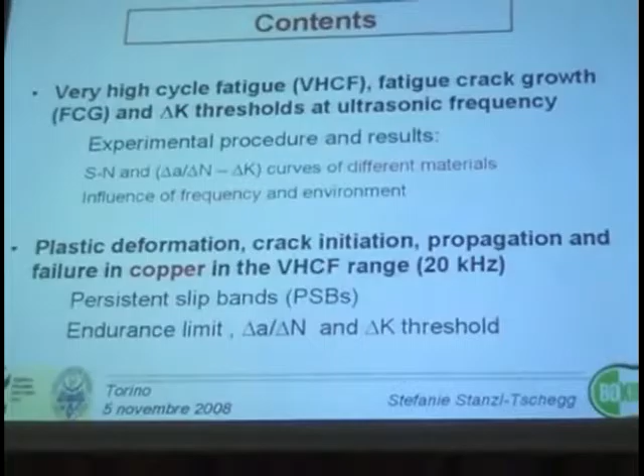I think it could be interesting to show you some more experimental methods which we are using and which we have developed, among these mostly the ultrasonic frequency testing technique. We'll go into some details. You asked about this already, and we'll show you how it works, and I will show you some results, not many, and of course we'll touch the question of the frequency influence. Is it high? How high is it existent?

Then in the second part of this talk, I want to come back to the topic which has been emphasized by Professor Mughrabi, which comes from this cooperation. He showed you the basics, the models, and new results. I want to show you some more experimental work in this field on the resistance limits, on the endurance limit, and also on the propagation problem in this copper material, in this type 1 material, as it has been named by Professor Mughrabi.

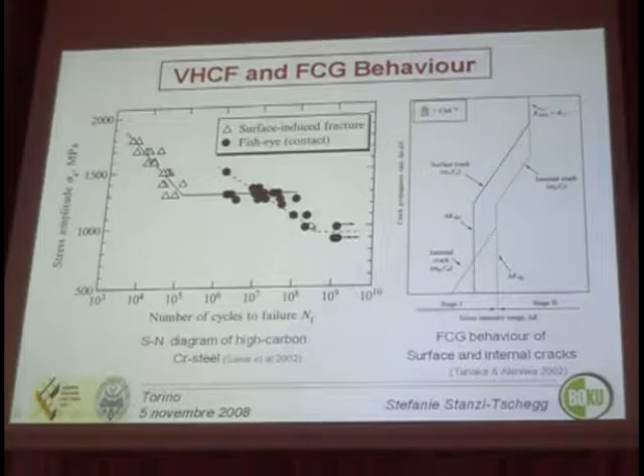And I come back to his introduction: very high cycle fatigue behavior of steels, where people assumed there is an endurance limit, a fatigue limit, until about 15 years ago, in the range of 10 to the 6. It was assumed that in former times we could construct things according to this assumption. But then Japanese researchers found out that there is still failure at much higher numbers of cycles at lower stress amplitudes. These are internal failures which have been discussed here now, and this was a very unpleasant situation to deal with.

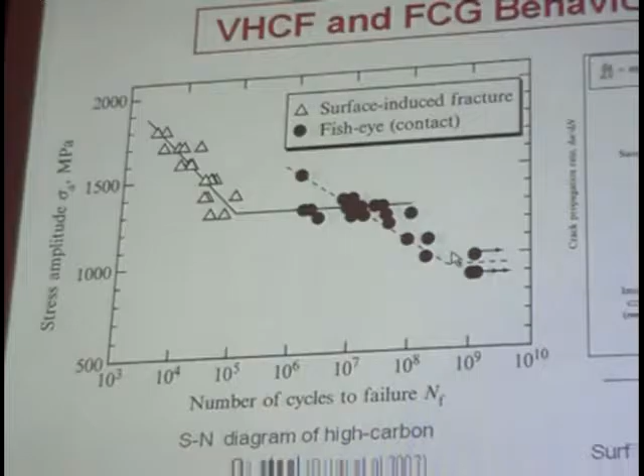How can we use the data of this fatigue limit now? I will show you also some examples on this, and together with this problem of the fatigue limit goes the problem about fatigue crack propagation.

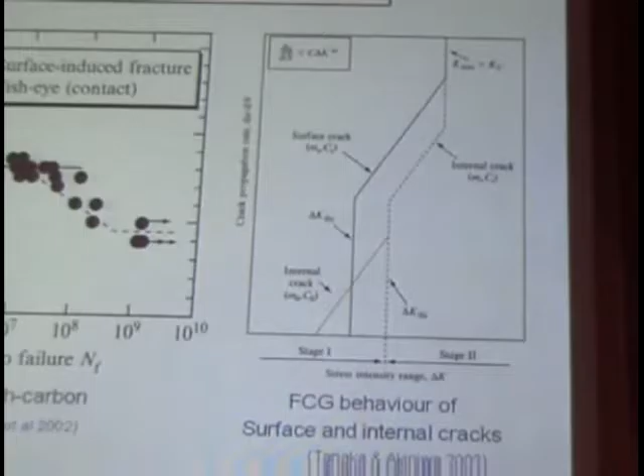Here you have a typical plot of crack propagation rate versus the cyclic stress intensity, which is stress times square root of a times a factor. This is a similar approach, the Paris scheme, where crack growth follows a power law, and then there is some regime at lower stresses where the crack should not propagate, where we have a threshold stress intensity.

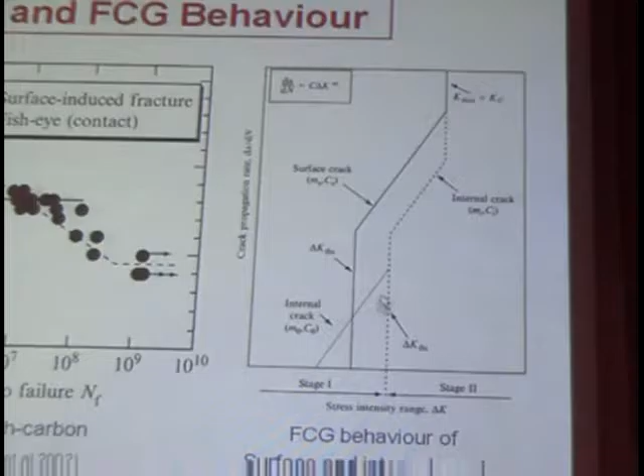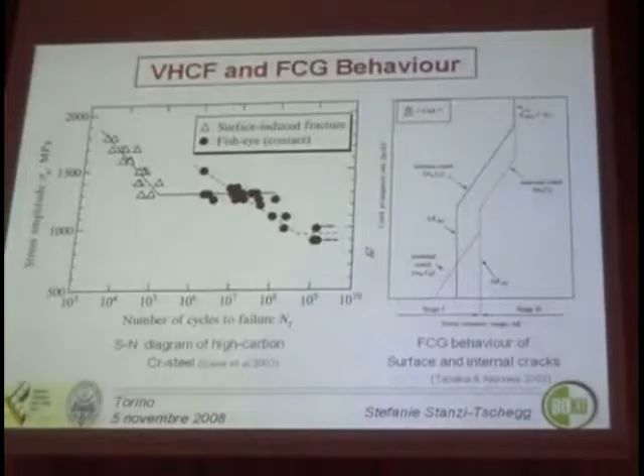This is also of importance to know the crack propagation behavior for cracks coming from the surface and for cracks beginning in the interior. This is the threshold regime which Tanaka, for example, treated: is the crack growing here, or does it have a threshold cyclic stress intensity or not?

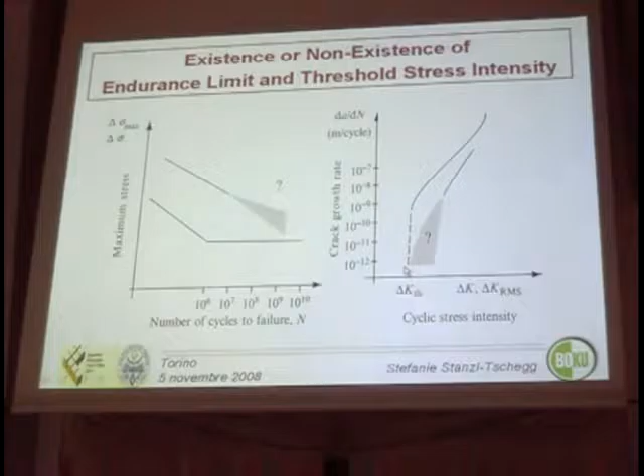So the question is now reduced to this: does the fatigue limit exist, like here, or not? Does the threshold exist in this diagram characterized by rate over cyclic stress intensity, or is there still some crack propagation?

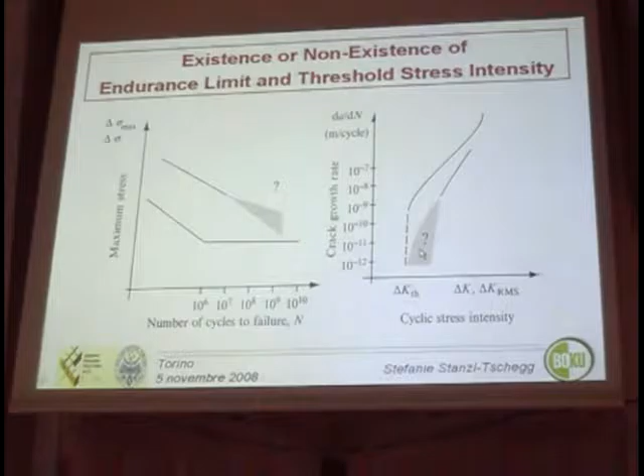We have performed most of our experiments with the ultrasonic testing method, which works at approximately 20,000 Hertz, as shown here. You see, up from 10 to the 8th or 10 to the 9th, it becomes very interesting to use this, due to the time needed for such an experiment. For example, 10 to the 9th needs 14 hours, whereas with the servo-hydraulic machine you already need 1.7 years.

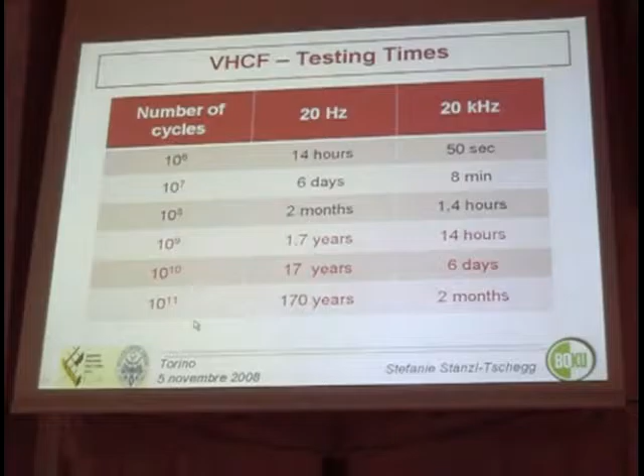Of course, you can use resonant machines and new equipment which goes up to 1000 Hertz, but anyhow, a test at 10 to the 9 will need at least 10 days here, and you see 10 to the 10 and 10 to the 11 become almost impossible to perform with other equipment.

So I come back to my university. This is our main old building. The university was founded in 1865 or even earlier; it's not quite sure how we declare this.

And this is our new building, where we have our institute and where we have further developed this ultrasonic technique. It was first developed in the 1950s, with the idea coming from America, from Mason, and also at our university, the Main University, in the 1950s it began to be developed. Since about 20 years, we have further developed it in our university.

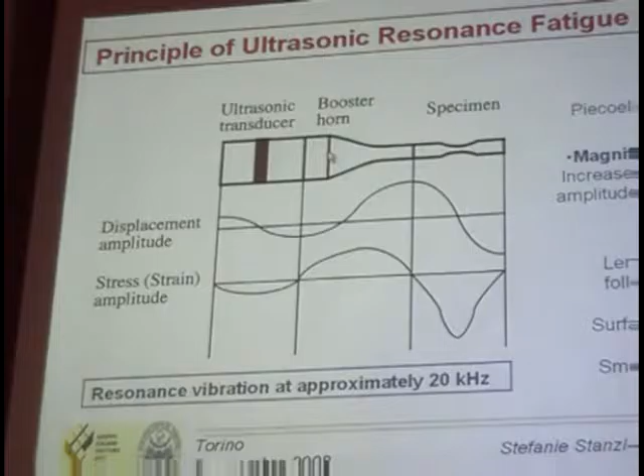So I now want to show you the principles of this. It is a resonance technique using barium titanate crystal, which works with the piezoelectric effect, and we get axial vibrations, or we also can do it with torsional vibrations. In this case, it's axial vibrations, which are then magnified by a booster horn, or amplification horn, made of titanium, and then it's again magnified by such a shape of a specimen.

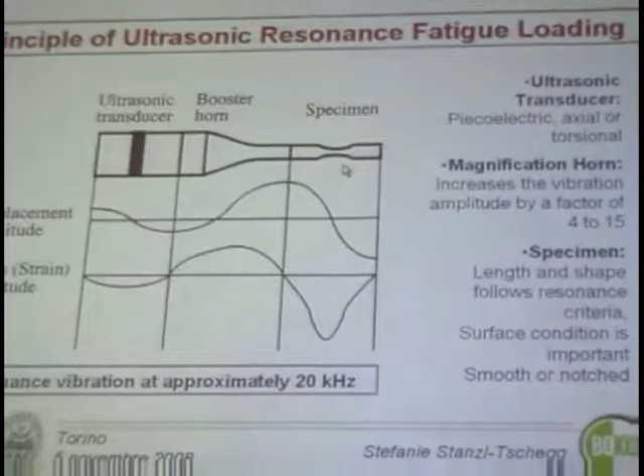The specimen would be cylindrical, then it is not magnified furthermore. Here you see the displacement amplitude, which is highest at the ends of the specimen and of the transducer, and you see the strain and stress amplitude, which is shifted by 90 degrees, so the maximum of the stress amplitude is in the middle, in the center of the specimen.

We use this distribution of the displacement to measure the amplitudes here or here, and then obtain the strains in the middle of the specimen, which also can be measured by strain gauges.

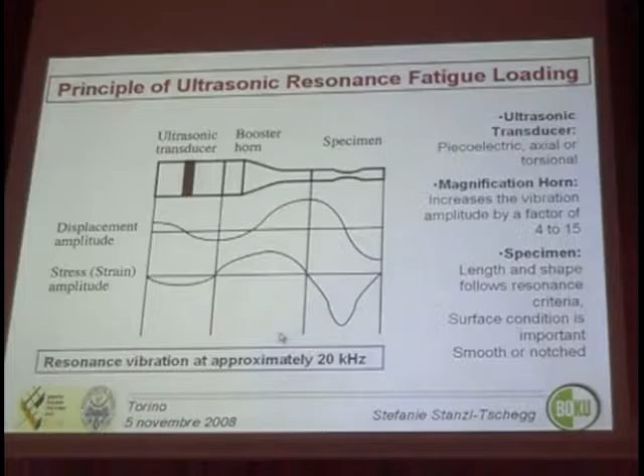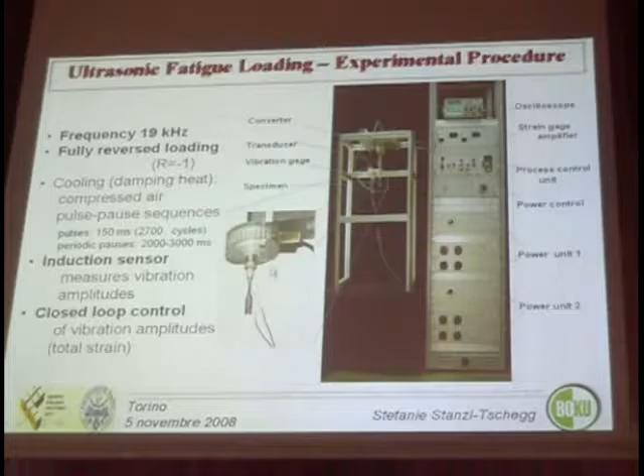I will show you this. This is our equipment, the photograph. Here's the mechanical part, here's the transducer and the specimen, and here this is magnified again the specimen, and a vibration gauge which measures these vibrations, and this is the electrical part, the power unit, the second one, and you can add three more so that you have high enough energy.

Process control, the strain gauge, amplifier, and oscilloscope to show the vibration.

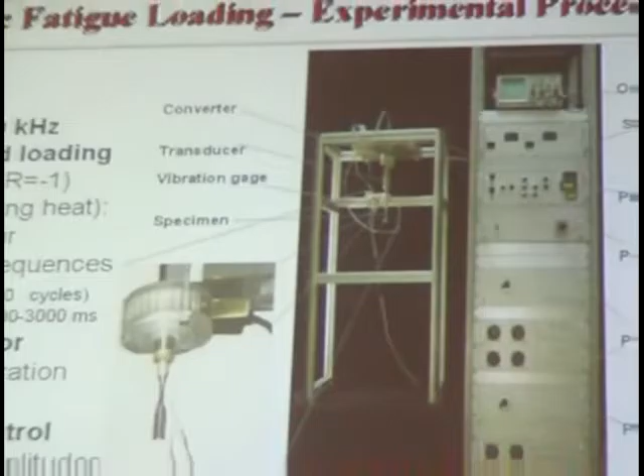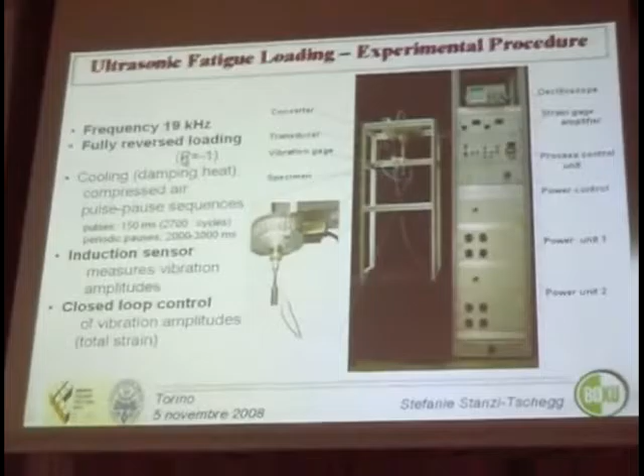So the frequency is around 20 kilohertz, and if the specimen end is free, it is a fully reversed loading, which you obtain with this R=-1, so it's tension compression.

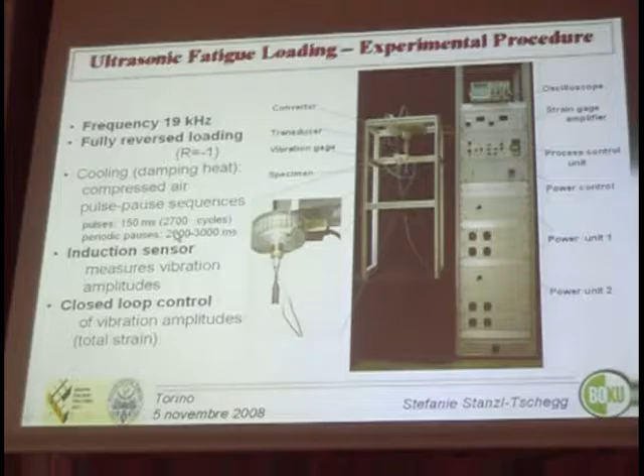We have cooled usually the specimens, at least the specimens or the system, with compressed air, and also we introduced pulses, pulse and pauses, intermittent loading, pulse pause loading, so that we remove the damping heat.

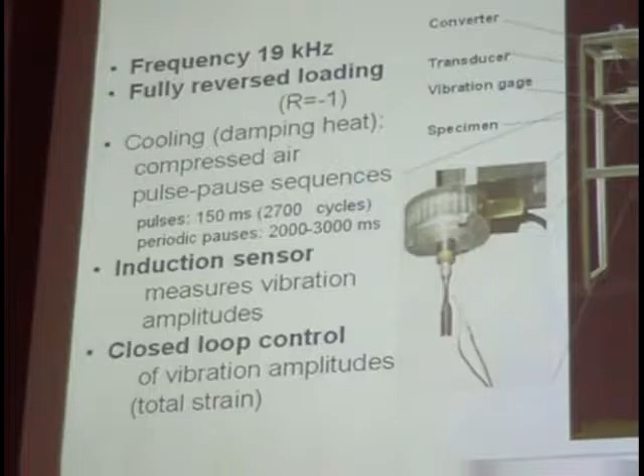Then we obtain room temperature and the temperature that we want to have. And what is important is also that we use the signal of this vibration gauge to control the process, to have a closed loop control, and to have a good and reliable control of the whole thing.

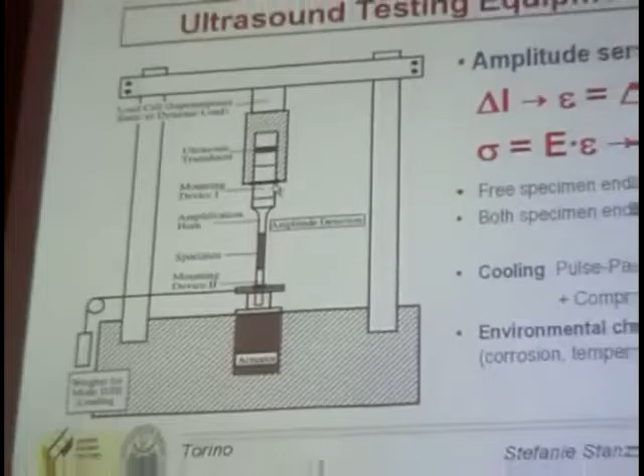So here you see again schematically how it works. This is the ultrasonic transducer, the amplification horn, the specimen, and a loading frame.

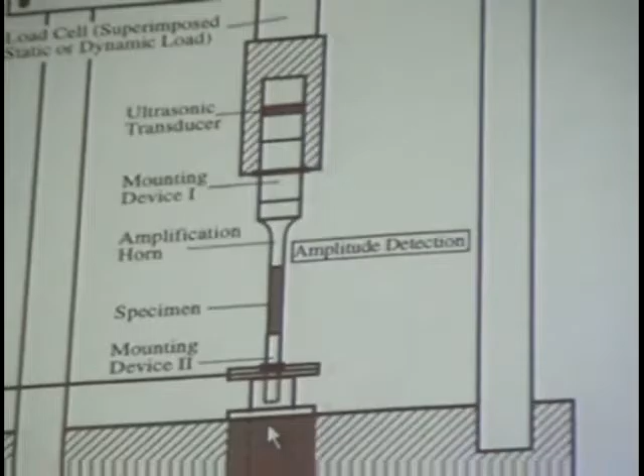In this case, it is shown that we also can fix the second end, so we can superimpose a static load to have mean values of loading larger or smaller than -1. So we have tension preload or compression preloading.

And here is shown how we obtain our stresses usually. We measure the displacements, get from this the strain, or we measure directly the strain gauges, and from this we get the stresses, usually just using Hooke's law, multiplying by the modulus of elasticity, and from this we get the cyclic stress intensity by multiplying with square root and so on.

So this can be done if there is almost no plastic deformation. Then it is enough to do this, but I will show you then what is going on if we have larger plastic strains.

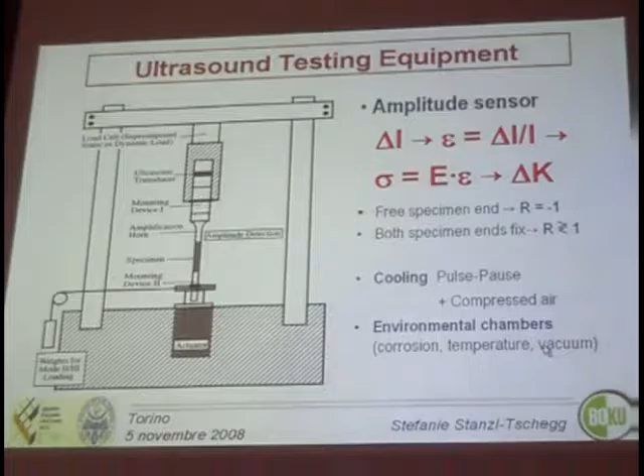Yeah, I told you already about the cooling necessity, and also we can introduce other environments by putting a chamber around this, corrosion tests or temperature, or we also can perform tests in a vacuum.

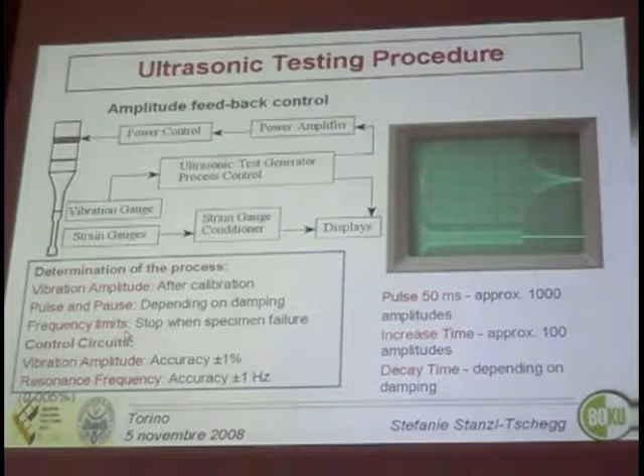And we can predetermine these amplitudes and can measure our vibration amplitudes to an accuracy of ±1%, which is quite good. And we can use the frequency also to stop the experiment if the frequency is changing. This means that there is a crack in it or some other thing which we specify.

So this only shortly. The specimens have to have certain lengths and dimensions in order to vibrate in resonance. For wrought materials, we use these hourglass-shaped specimens with a smaller diameter. This is increasing the amplitude much more.

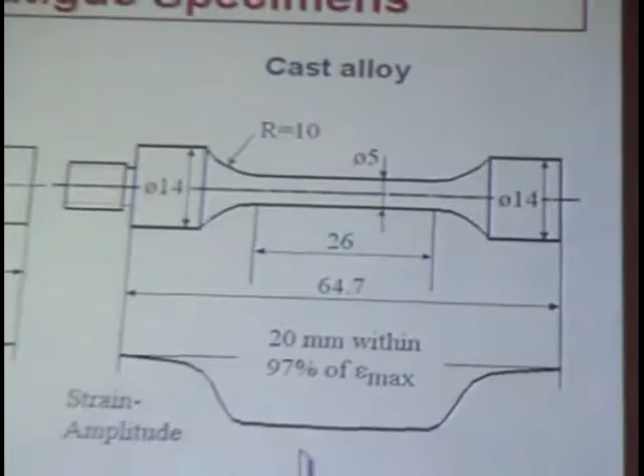And for cast alloys, where we want to have big volume, we use this with a cylindrical shape, which is constant, has an amplitude or stress across a longer distance. Thank you very much.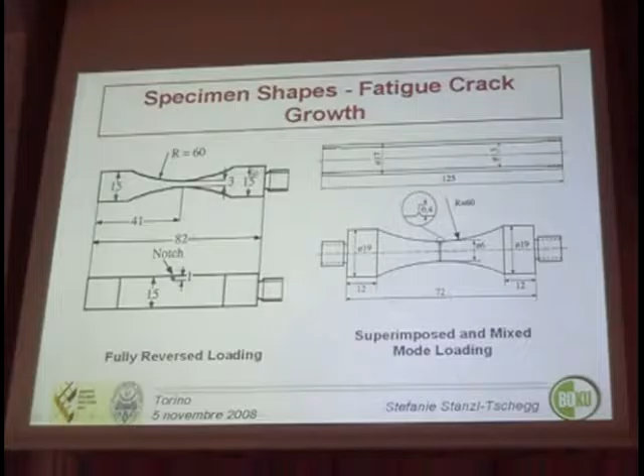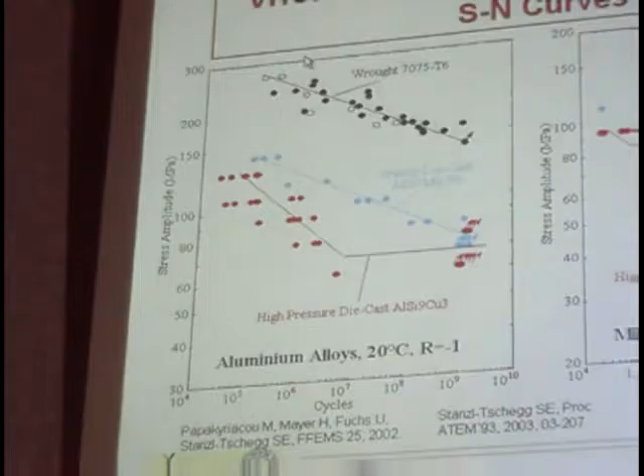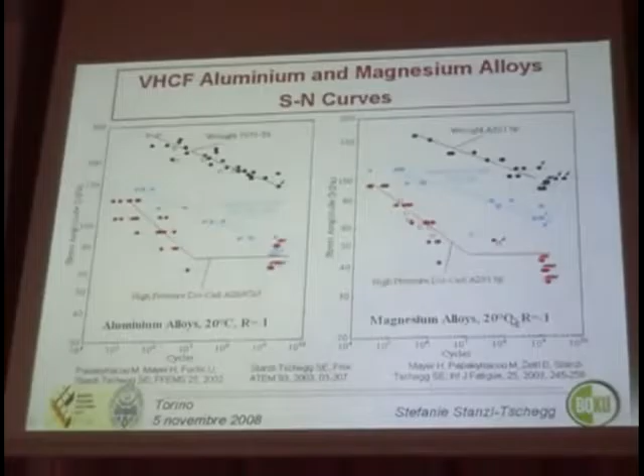These are the specimen shapes for crack growth experiments. There we use usually flat specimens with a notch in it, and we also use tubes with a small hole in it, to be used if we want to superimpose a second load, or round specimens with a circumferential notch. So that's all possible, and we only have to take care that it still is vibrating resonance.

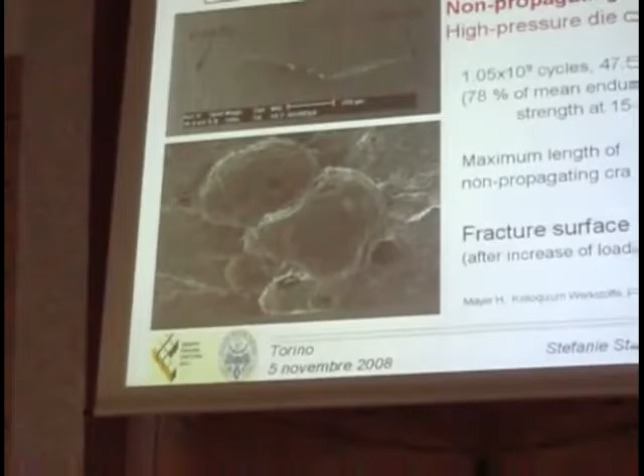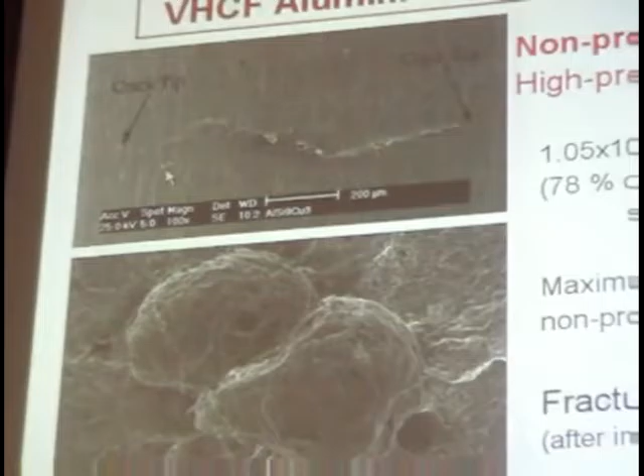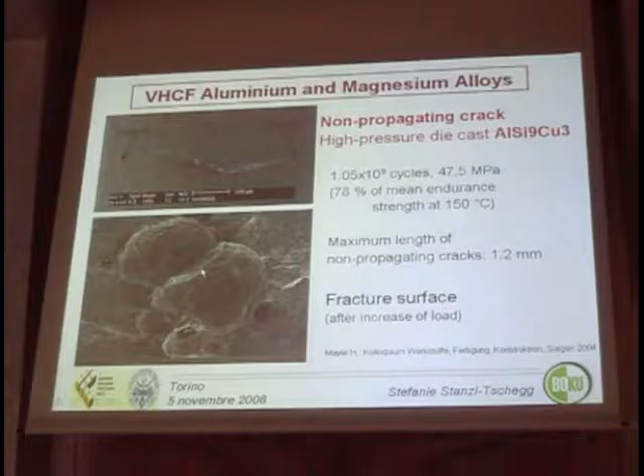This needs only a program, and we did these experiments, and there we again asked the question, is there a fatigue limit, and is there a delta K threshold value for these applications of varying amplitudes. And now I would like to show you some results.

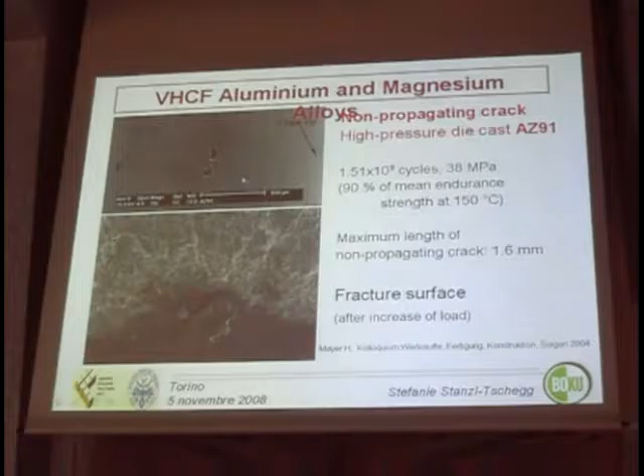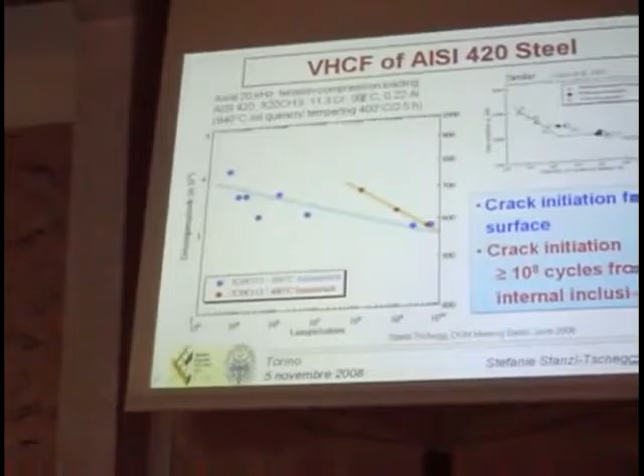This is showing you now two types of materials, aluminum alloys and magnesium alloys. I don't say anything about the frequency effect there, but I would like to treat the question about the fatigue limit. We usually know that aluminum alloys do not have a fatigue limit. This is for the 7075 material shown here for the wrought material. For high-pressure die-cast aluminum alloy, again, no fatigue limit.

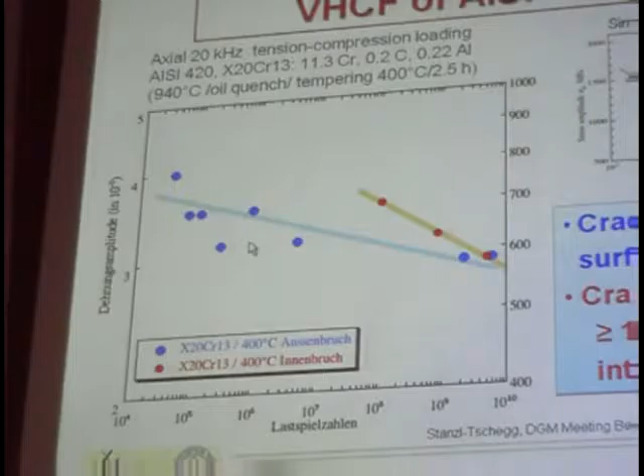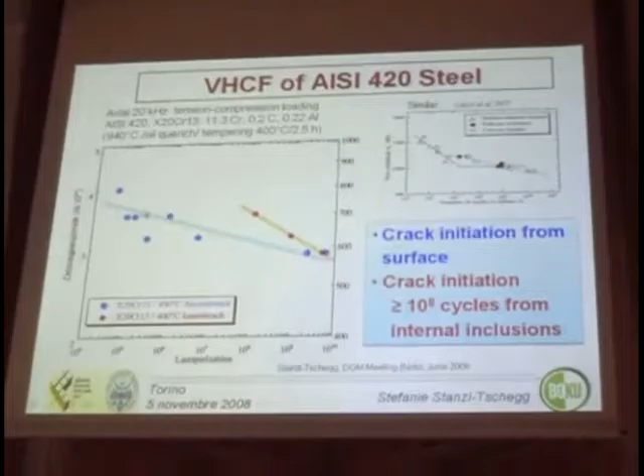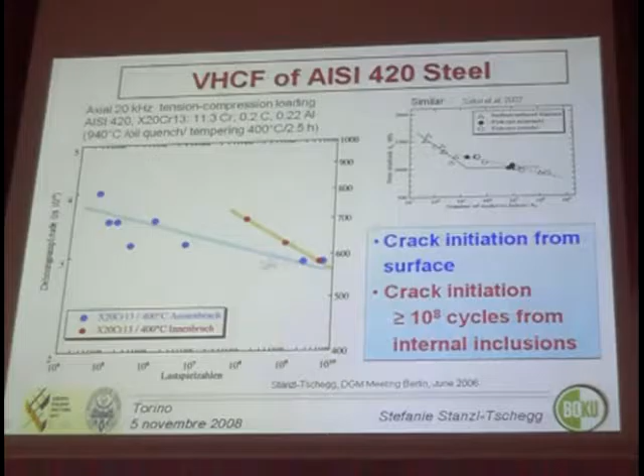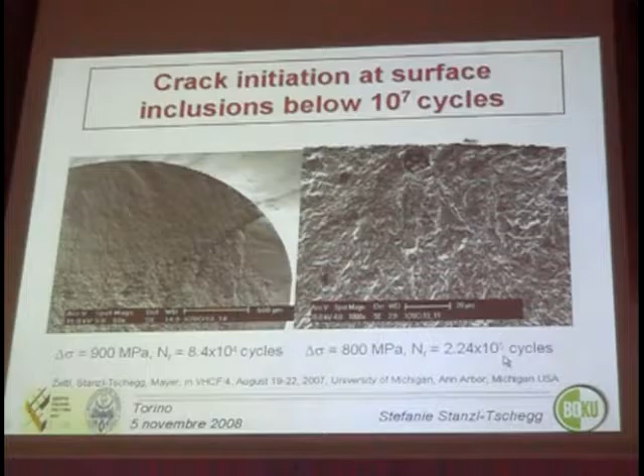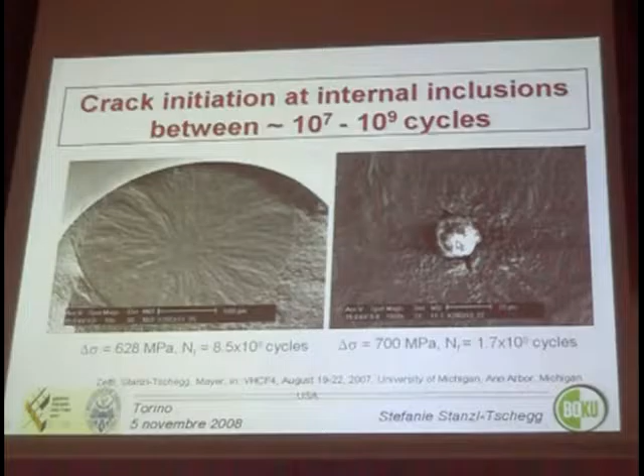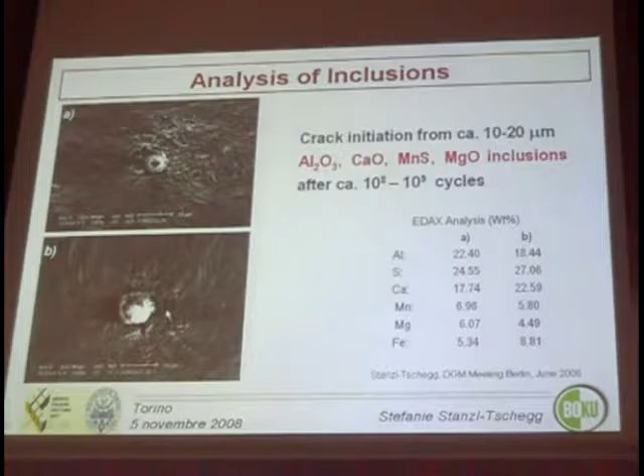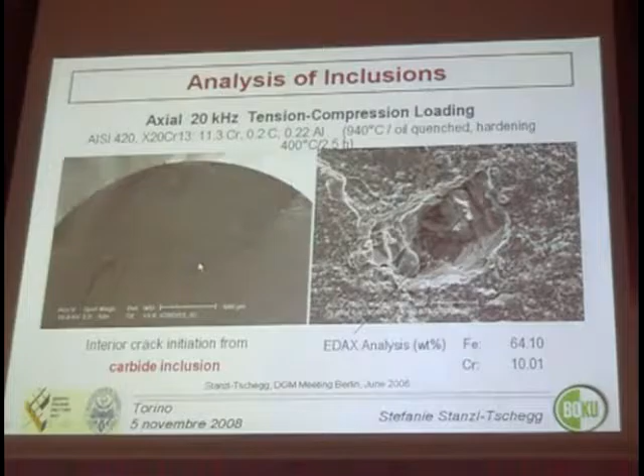And now I come to another material, to the steel AISI 420, which is a chromium steel, turbine blade material, in this case it was 11% chromium, 0.2 carbon. And this material has been fatigued, and we saw that at higher numbers of cycles there were higher values. So, and we observed crack initiation.

And this reminds us to the plot which has been published quite often by the Japanese people, where they show that the internal cracks may start, may lead to failure even below the fatigue limit. We did not get this so far, but which have the twofold, which have another lifetime, there they live longer.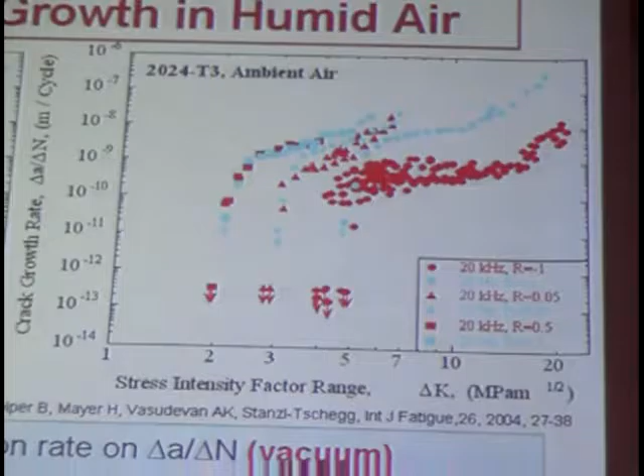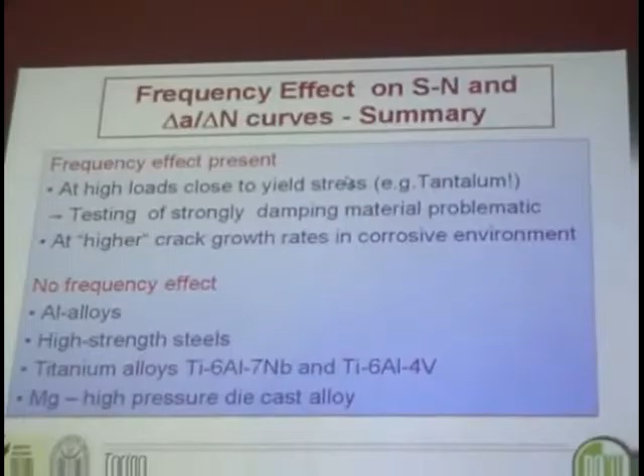So now about the frequency effect in our crack growth experiments. There we again tested many alloys, and one example is shown here, the 2024 aluminum alloy, heat staged. This test was performed in vacuum, and these tests were performed in ambient air.

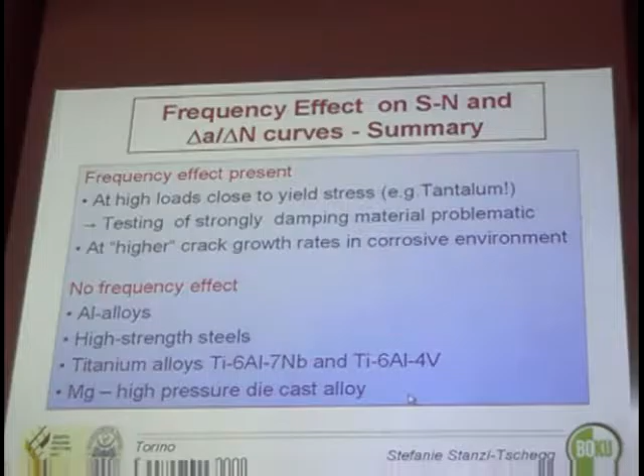The blue dots here come from the low frequency testing from the 20 Hertz machine. We performed this with a servo hydraulic machine, and the red ones come from our ultrasonic tests. We performed the experiments at mean values R-1, with full R approximately 0, and with a tensile overload. What you see here, these fit together very well. There's no frequency effect - again no frequency effect, and also here no frequency effect.

If the tests are performed in vacuum with this alloy, or these alloys - if the experiments are performed with the same material in humid air, this is R-1 with the ultrasonic method, and this is R-1 with the 20 Hertz machine. There is an influence. The environment influences the result, and we can understand this quite well.

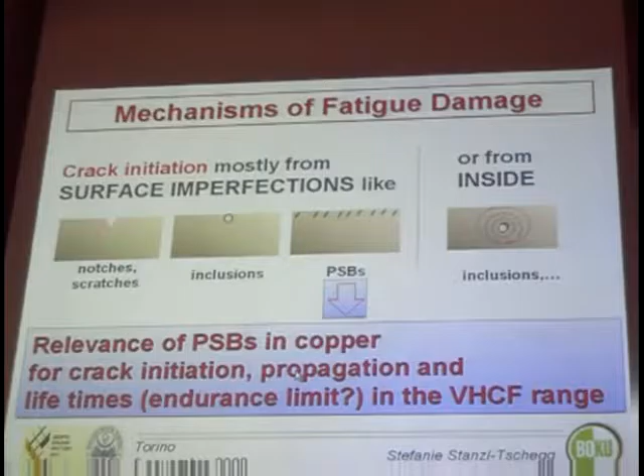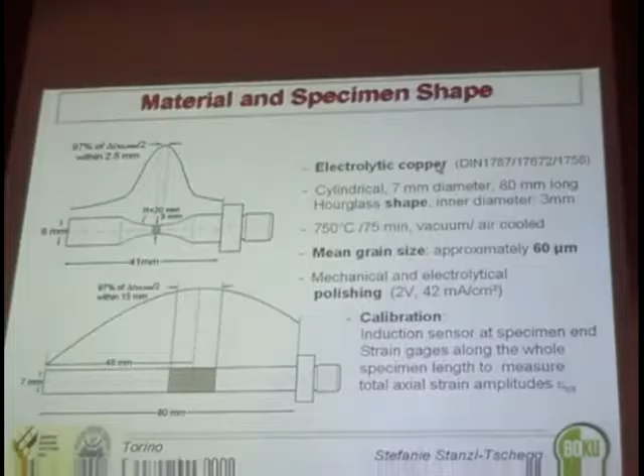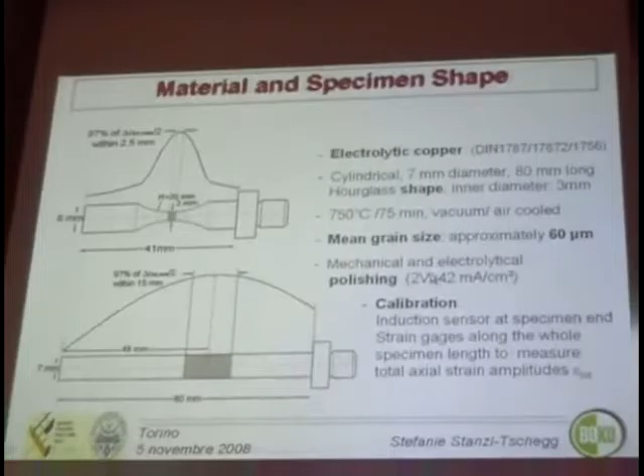The ultrasonic test is much faster, much quicker. There's not so much time to enter the crack tip compared to the lower frequency. Therefore, this growth rate is faster at the low frequency, whereas it is lower by a decade or more in the ultrasonic test. If we use other mean stresses, the effect becomes less.

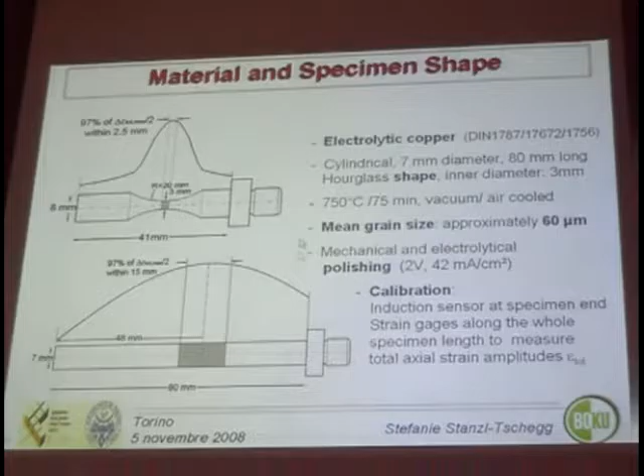This is an almost open crack. It's a very high load, and there's not much influence, but we have to take care of course. And what is even more interesting is that the threshold values are in all cases the same. Why? The ultrasonic testing is again long enough that the environment can penetrate into the crack tip, can enter the material and so on.

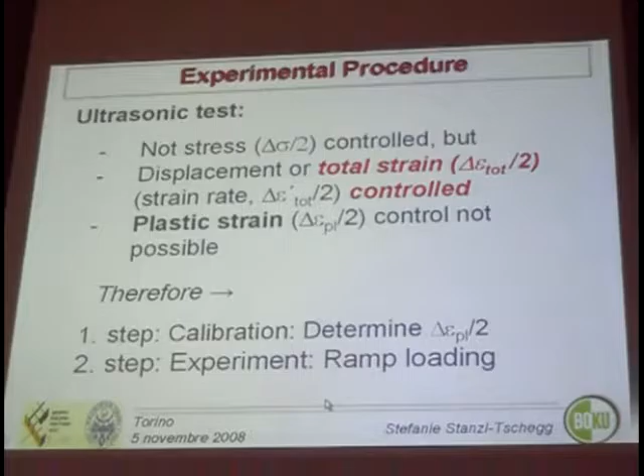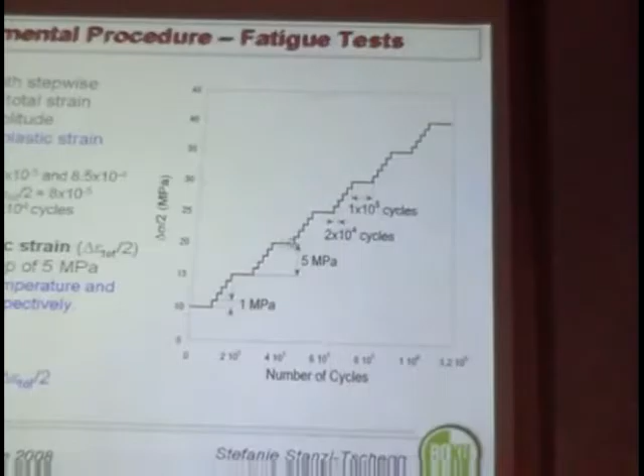So that's quite interesting, and we have to consider this - I have summarized this here. The frequency effect is present at high loads which are close to the yield stress, of course also in other ductile materials, and testing damping will be a problem - polymers and so on, it's a problem to test this. If we are working in a corrosive environment, it would be the same if we consider other time-dependent processes, temperature and so on.

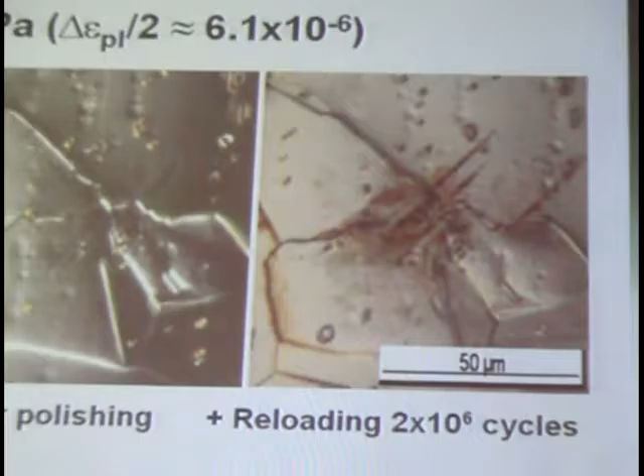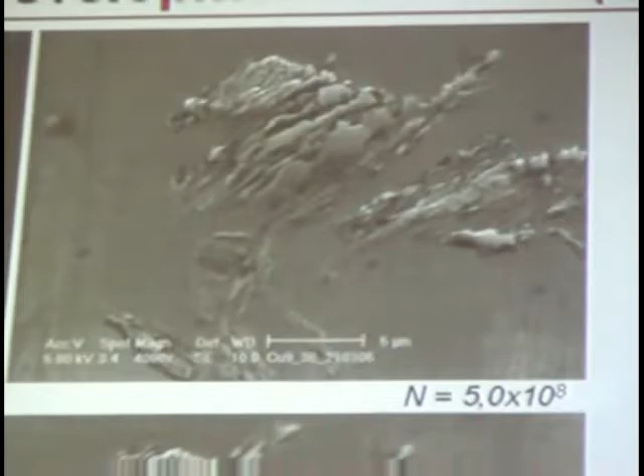So no frequency effect has been found so far in most aluminum alloys, in high-strength steels, in titanium alloys, which I did not show here, and in magnesium high-pressure die-cast alloy.

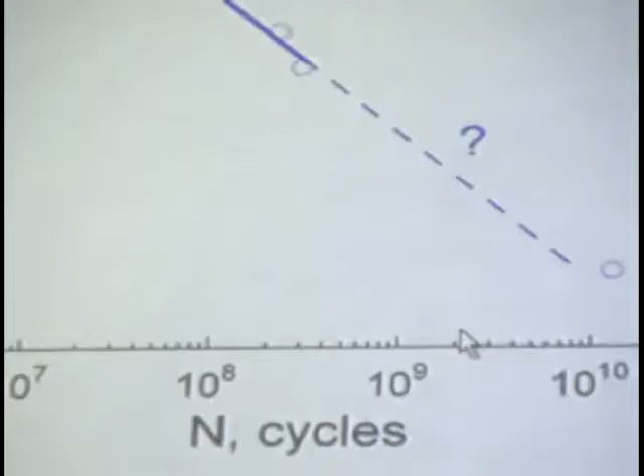So that's what I wanted to tell you in my first part. Yeah, I must look a little bit now.

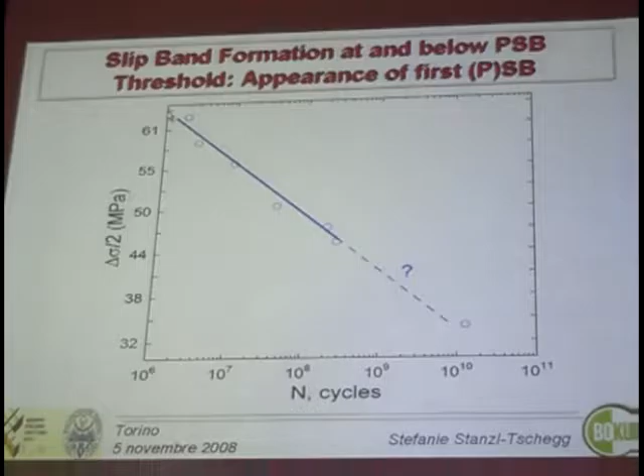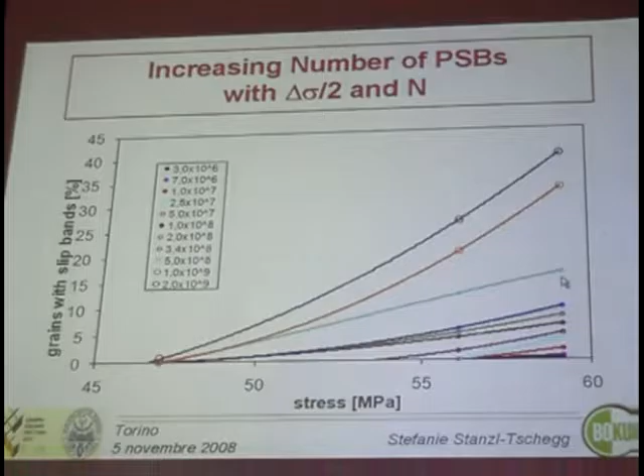And now I want to come back to the second topic of my talk, in copper polycrystalline material - the question of how persistent slip bands influence crack initiation, crack propagation, and failure. I show you now this question not from inclusions and not from inside inclusions, but surface-induced PSBs - maybe also inside, we don't know - and how they influence the failure in this material.

We polished it, first mechanically and then electrolytically, so that low compressive loads were introduced, and calibrated the whole very carefully.

The main thing is that this is a strain control experiment, so we measure strain with the strain gauges, and it is controlled via these strains or displacement amplitudes. Therefore the test first has to be calibrated to obtain and measure plastic strain amplitudes, which cannot be measured directly. To determine this is rather a long process.